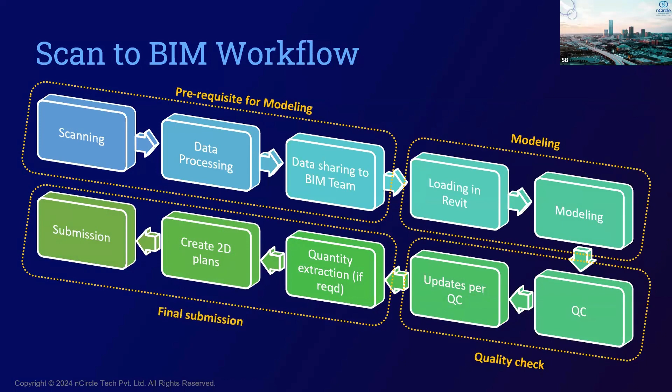Yes, Saurabh, you can move ahead. As we are seeing in this slide, this Scan to BIM process comprises an array of sub-processes, from scanning, which is a prerequisite for the modeling phase, followed by different processes till the submission of the final BIM model. We understand each process as we move ahead in today's session to keep it easy for our audience. Sure, Saurabh.

Myself and our audience are all ears. I request you and Vrushali to please take us through this interesting service.

As you might have understood by now, scan to BIM represents a significant change in how we collect and reconcile the data of old and existing structures. We generally face issues of not having any digital copy updates made in the building throughout the years. So scan to BIM focuses on resolving these types of issues.

It provides unparalleled accuracy in documentation and visualization, which is crucial for planning and design to avoid costly errors, but it also fosters collaboration by providing detailed 3D models. It ensures everyone is on the same page.

In addition, with precise initial data, it also saves time and cost by avoiding frequent site visits and revisions. It also enhances site safety and facilitates sustainable renovations. Its impact is indeed profound.

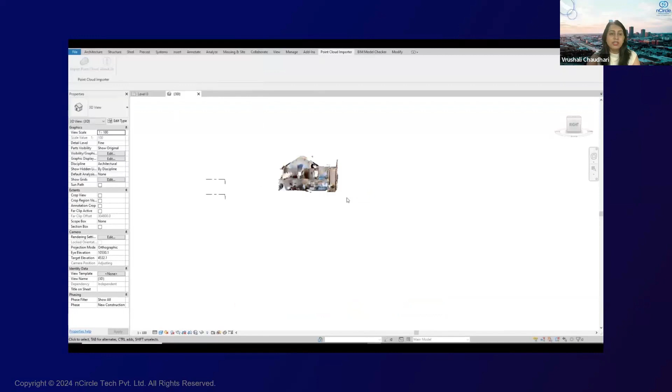We can see in the video, we have selected a file and it got loaded in Revit. And not only this, but we can see we can load it with the required coordinates too.

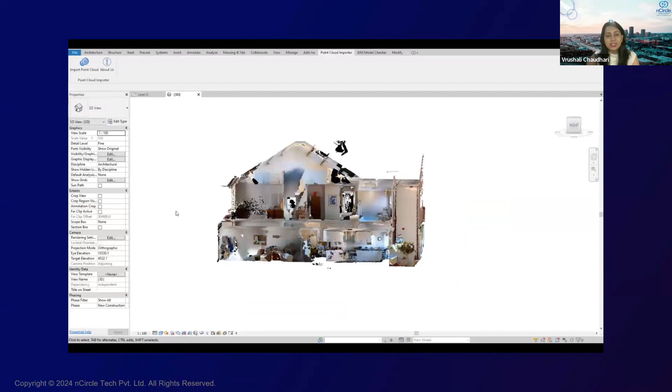The plugin supports a wide range of input point cloud file formats like E57, LAS, LAZ, TXT, PTS, XYZ, and PLY, making it versatile and compatible with various sources. With this tool, we can save roughly 10% of our time.

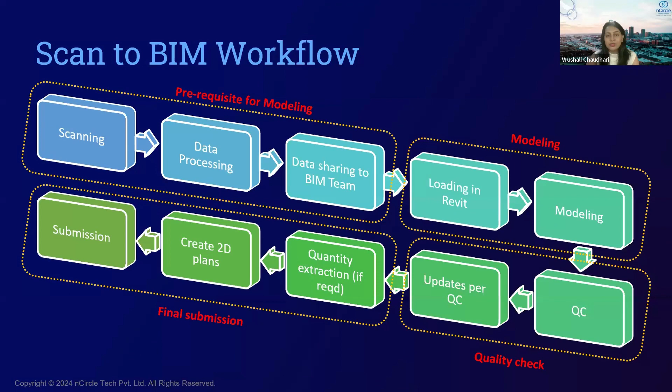So now that you have the point cloud data in Revit, the process of modeling takes over. Yes, and the Revit modeling describes the geometry of the model elements and captures the design intent and logical relationship between the elements. It employs sketching and drafting functionalities to create walls, doors, windows, and other architecture elements, also elements which are related to other trades like MEPF and structure as well.

For scan to BIM models, we need to pay attention to the exact dimensions and alignments for precision. Also, we need to ensure the flexibility and adaptability of components to accurately present the scan data.

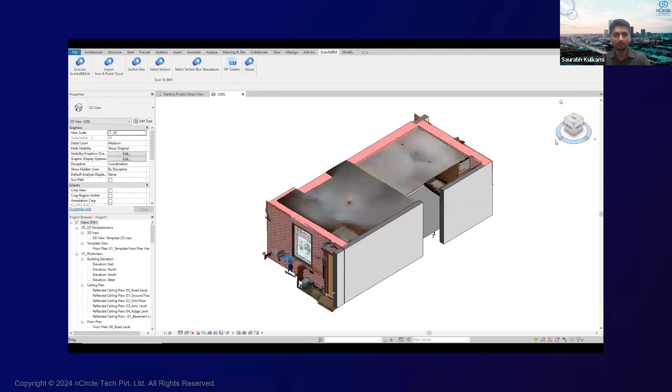And like you are seeing on the screen, the automated 3D model architecture elements have been already generated through one click only, without any manual intervention. And that is the plugin that we have developed.

Great, Saurabh. I'm sure it must be proving to be a great help, the way you have explained, in overcoming the tedious, redundant tasks of the BIM teams.

But we all know how critical quality check is when it comes to infrastructure, be it individual or commercial. So I would like to know, do we also have a magic wand for this? I'm afraid we do have.

We understand quality control is crucial to ensure products or services meet specified standards and customer expectations. QC in scan-to-BIM projects involves checking for completeness, ensuring that all relevant elements and details from the scan data are properly incorporated in the BIM model. It also includes verifying the consistency of the model with the project specifications and standards. Regular checks during the scan to BIM process help identify and rectify discrepancies early on, contributing to the overall success of the BIM implementation in construction and facility management.

That brings us to another impactful tool we have developed to help with the QC processes: Deviation nSpector. It has significantly streamlined our quality control process. Before, we depended heavily on manual reviews, which were time consuming and error prone. Now, with this tool, we can quickly identify and correct discrepancies in our models. It's not just a time saver, it's also added a layer of precision that was previously unattainable.

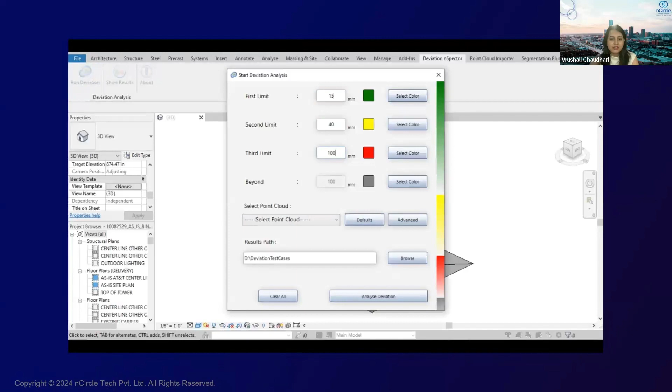We can see in the video, as we select the tool, it gives us an option to select the tolerance limit with color codes. Once we hit the apply button, it starts. Now, as we can see in the tool, we are applying the analysis and it starts its analysis.

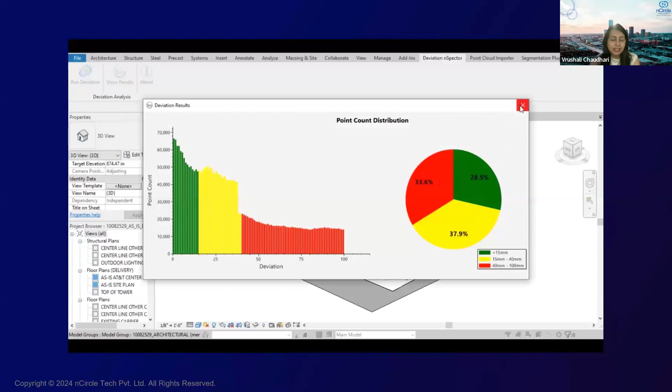That's some real technological aid indeed, Vrushali. Speaking of advancements, when it comes to the critical task of quantity extraction, how has the shift from traditional manual methods to more modern automated processes influenced efficiency and accuracy in your projects? Do we have any tool that accelerates this process as well?

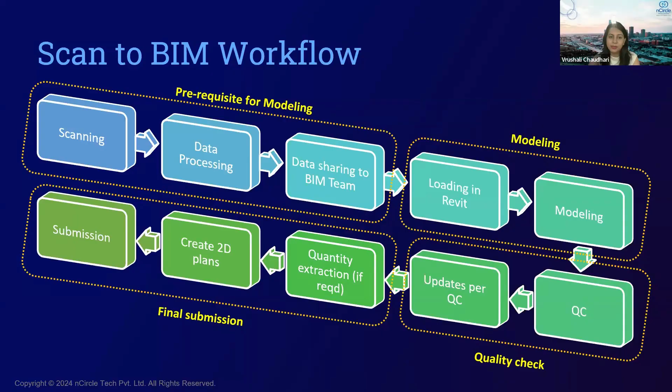Yes, transitioning to automated processes for quantity extraction has been another major improvement. Manually, it was a slow and labor intensive process. Now we can rapidly and accurately extract material quantities, which enhances our cost management and project planning. It's faster, more accurate, and allows us to handle multiple projects simultaneously. BIM quantity extraction relies on information embedded in the 3D model. This model based approach allows for dynamic and interconnected data that goes beyond traditional 2D drawings.

We developed in-house automation to obtain capabilities such as scheduling and report generation, allowing users to organize, evaluate, and extract data from the models. This information may contain material amounts, areas, volumes, and other details. As BIM quantity extraction is crucial for accurate cost estimation, by associating cost data with model components, you can obtain real time cost calculation based on the project's evolving design.

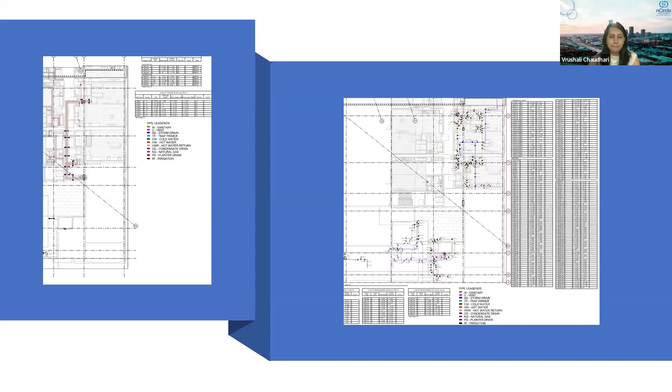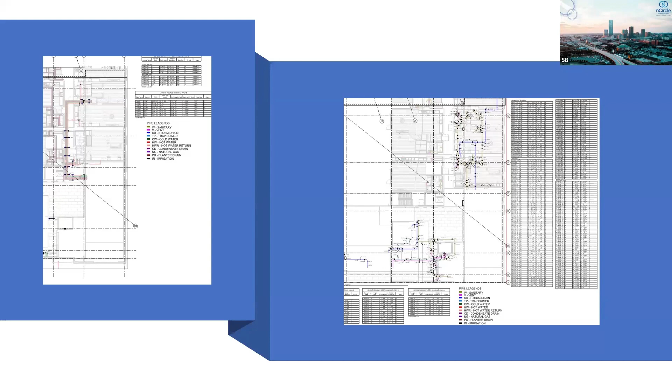Sounds really helpful indeed, I must say. But what I remember seeing on one of the previous slides was creating 2D plans post this stage. How does that work? That's right. Sheet work provides information like annotations, dimensions, schedules, and many others for the elements that a person has modeled in 3D. This gives an idea to engineers and foremen about the elements without opening the actual model. The sheet work is an important part of the process as it reflects the 3D work which is being done.

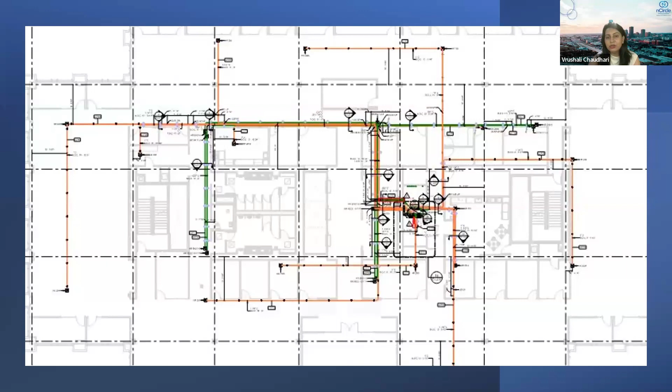When it comes to final submissions, we need to transfer the model's sheet work which is being created from scanned data to the end customer. For this, we have a platform already under development, which you have seen a few slides back, named NBIM, where you can transfer and share the data easily, and you will have added features too. It will allow us to not only access and document the projects more easily, but also to view them and quickly review them. It does provide data security. Access can be provided to each member based on their role.

This definitely tells me that including automation in a technological boom like Scan to BIM can largely boost efficiency, helping achieve better outputs. But like they say, every coin has two sides. So I'm keen to know, did you also face any challenges or hurdles while integrating or executing these Scan to BIM technologies or these kinds of automations in your projects?

Yes, Nigda, the challenges, as we know, are as evolving as the technology itself. First, the cost can be significant, especially for smaller firms. High quality scanners and the related software are a substantial investment. Secondly, there is a steep learning curve. Training staff to proficiently use all of this technology requires time and resources.

But the data management can be very overwhelming. We are dealing with massive amounts of data, which necessitates robust storage and processing capabilities. And obviously, integration with existing systems can be tricky as well, because ensuring that the new scan to BIM process seamlessly fits into the current workflow can often be a hurdle.

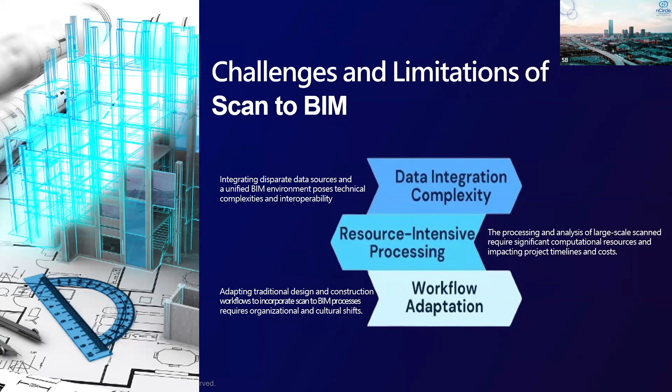I must definitely say, Saurabh, that's an optimistic outlook. But considering the environmental impact, how does scan to BIM contribute to sustainable building projects? Because sustainability is something that everyone is looking up to right now. That's like the need of the hour.

Yeah. So, obviously, Scan2BIM has a significant role in promoting sustainability. Firstly, by ensuring accurate measurements, we are reducing the rework and minimizing the waste. Secondly, it aids in retrofitting old buildings, which is more sustainable than demolishing and rebuilding. Third, the precision it offers helps in optimizing material use and energy efficiency in new construction. Essentially, it supports the entire project life cycle in a more environmentally friendly manner.

That's indeed a crucial contribution, definitely. Can you also tell us about how Scan2BIM is being integrated with other emerging technologies like AI and IoT? Because I'm sure we have heard how we are integrating technologies into Scan2BIM, but I would like to know the other way around. How is it working for you guys?

Yes, absolutely, Sridhar. The integration with AI is particularly exciting. AI algorithms can analyze scanned data to predict structural issues, automate model generation, and even suggest design optimizations. As for IoT, when combined with Scan2BIM, it can provide real-time data on buildings, enhancing maintenance and operational efficiency. This synergy has paved the way for smarter, more responsive building designs.